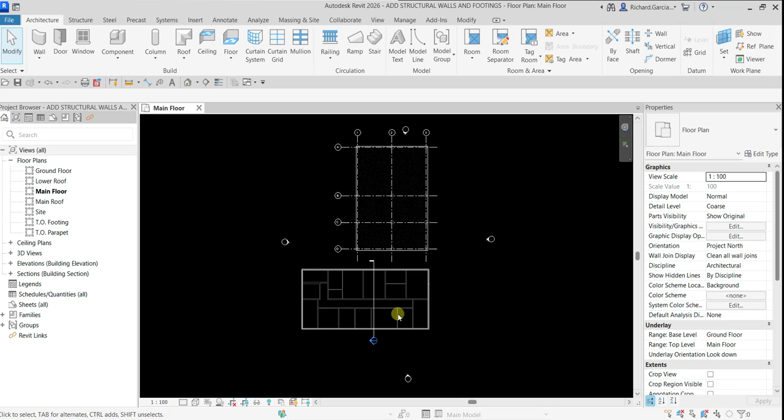Okay, so let me just go back. All right. So here, let's add a structural foundation wall, here in this area. Let's go to our architecture tab, wall. We will be selecting here wall structural, and then we are going to use foundation wall 300 mm. So let's check the properties here. We will be using this basic wall foundation 300 mm.

And since this is a foundation wall, you will not be able to change the depth settings here. That's how the foundation wall works. Basically it will start from your current level and go down from the main floor to the lower portion of the main floor. For the height of our wall, let's change this to 1950. And then for the location line, let's use core face interior.

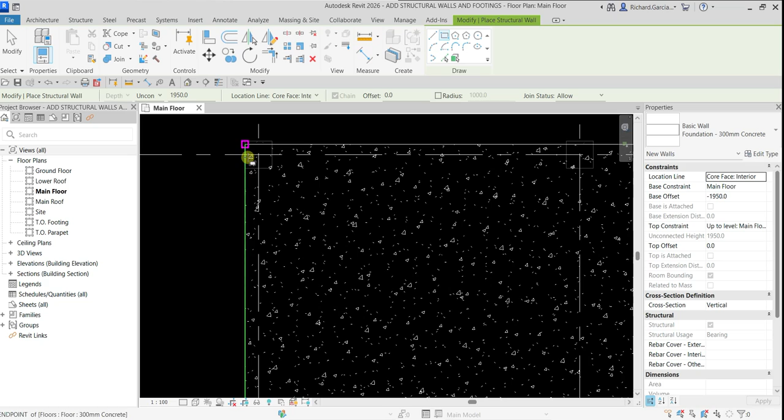For the draw option, since this is a rectangular shape, I'll just select rectangle. There you go. We are now ready to create our foundation wall. I will be starting at the upper left corner of the floor slab. Click that one, and then click the second point of our floor slab. There you go. So there's our wall foundation. And then I'm going to select modify.

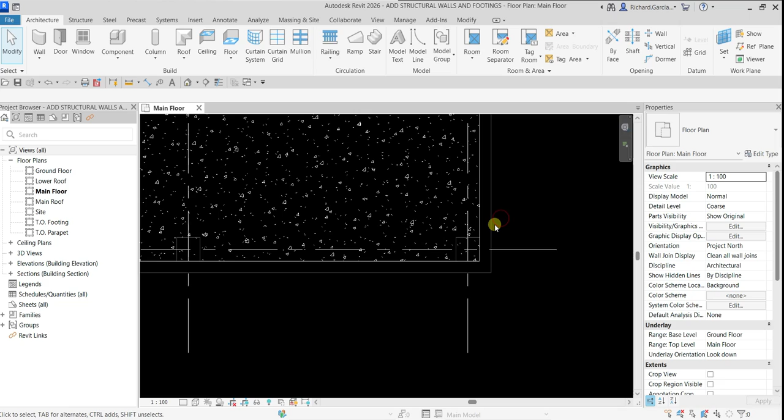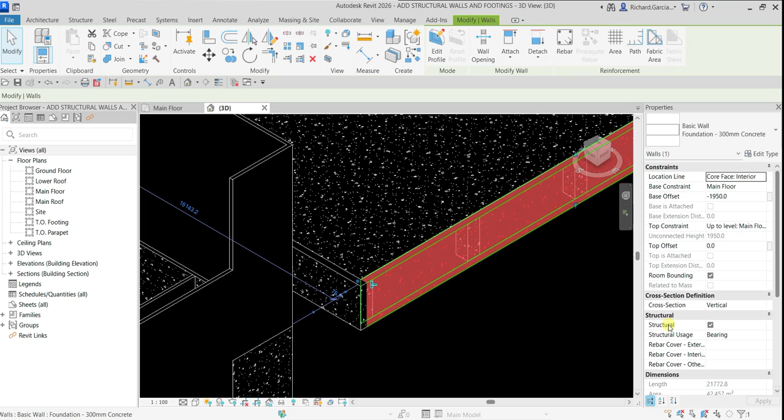Now I'm going to select one of the structural walls that we just placed. Let's go to the 3D view and have a look. This one, right? This is our foundation wall. I'm going to select this. Here on our properties, notice that on the structural panel, the structural usage for this one is bearing, which is correct. So that's for our wall foundation.

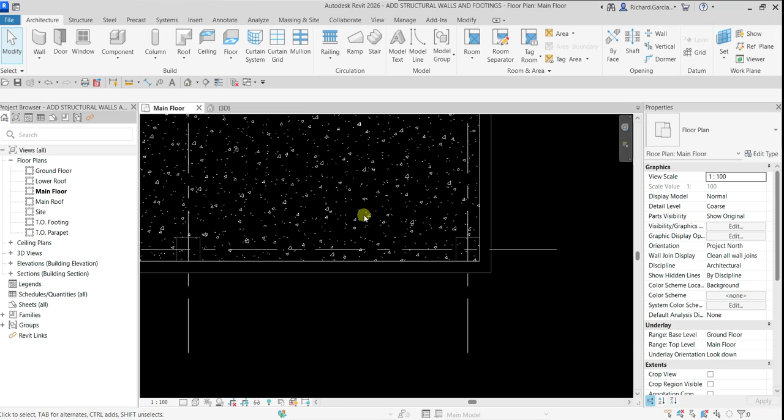Now the next thing, going back to our main floor, we're going to place continuous wall footings and then isolated footings. So let's create first our continuous wall footing. Let me just zoom out. Let's go to our structure tab, and then on foundation, we will be selecting the wall foundation. It creates foundations hosted by walls. So I'm going to select this.

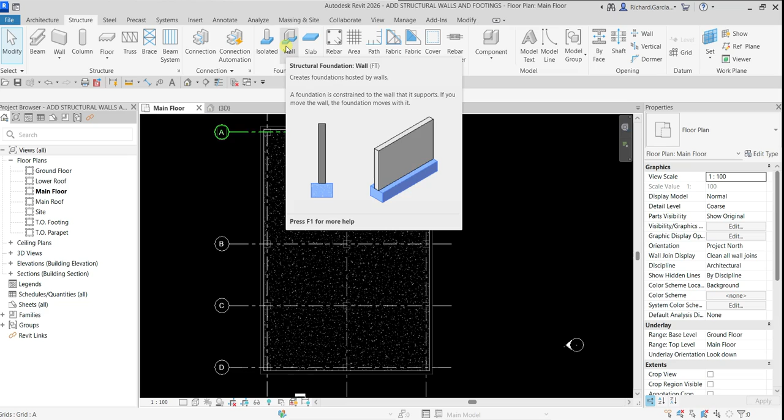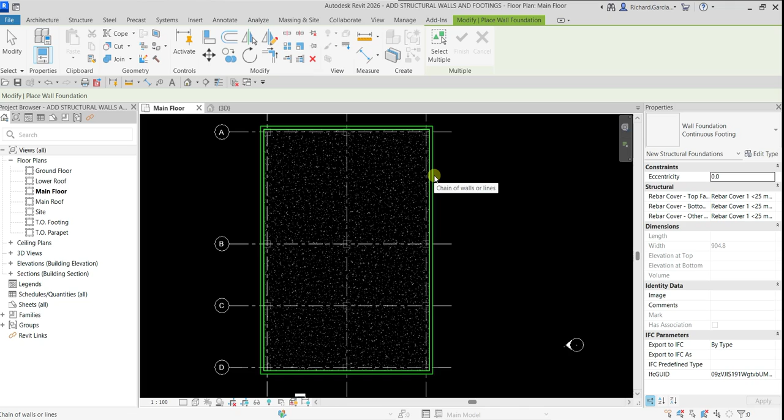Then I'm going to place my cursor over one of the structural walls, this one. I'm not going to click yet. Just move your pointer over that structural wall and press tab. Once you press tab, it will highlight all 4 walls. Let me do it again. I move my pointer over the foundation wall and press tab once, and it highlights the 4 walls. Once it highlights, click to place our continuous wall footings under the walls.

So I'll just select modify, and then let's have a look at the 3D view. And there you go. Let's change the detail level to fine, visual style to shaded. So that's the one that we just created.

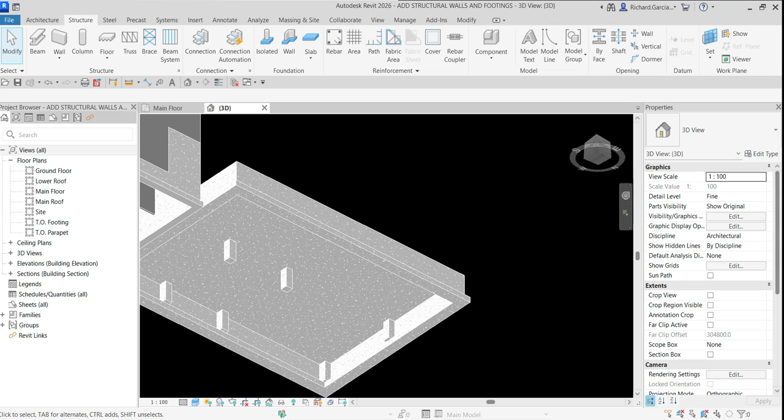Let's go back to our main floor. This time we are going to use isolated foundation. Let's click this one and wait. You see there's an option here: mode and multiple on our contextual tab, where you can place your isolated foundation at grids or at columns. I'm going to place it at the columns because we already have columns here. So I'm going to select at columns.

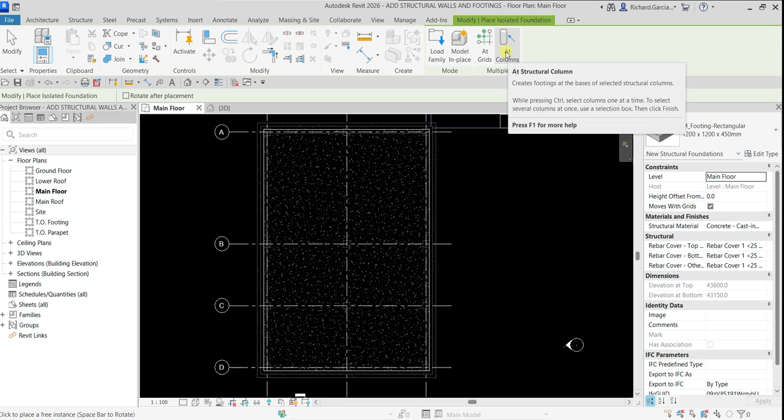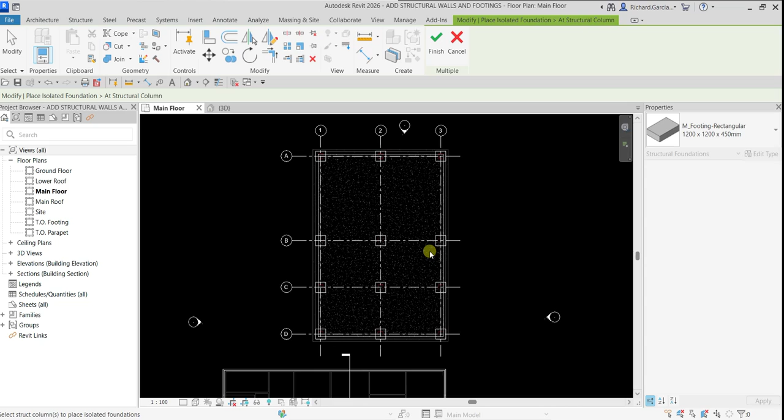We need to select all the columns, and our isolated footing will be placed under each column. Let's use window selection, and as you can see, it's highlighting the columns. Once I select it, it shows a preview of our isolated footing. After that, just select finish and you're done. There's a warning: an attached structural foundation will be moved to the bottom of the column, which is what we want. So just close that warning.

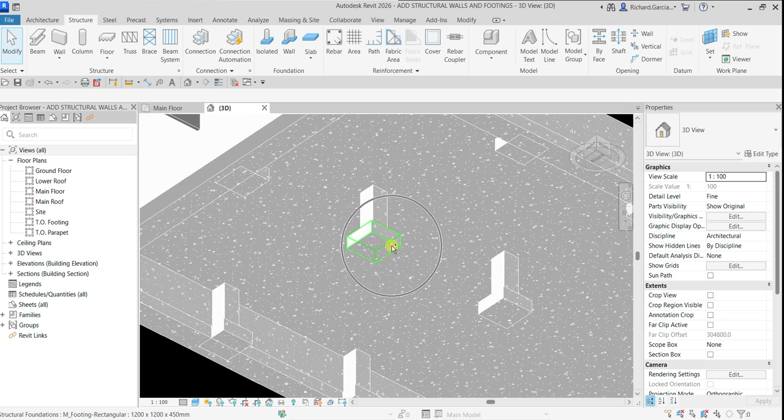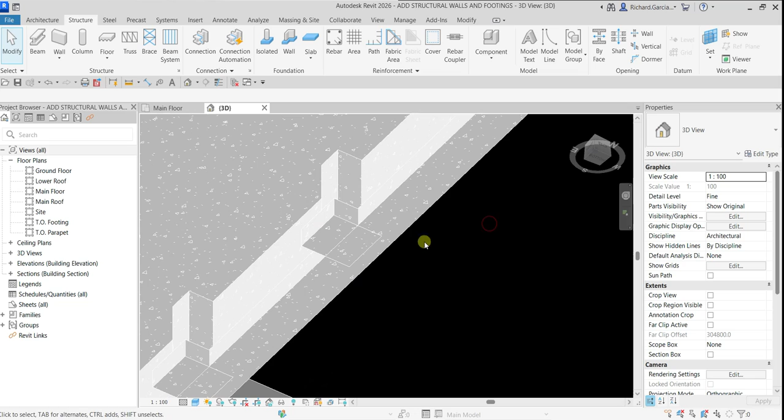Then select modify, and let's have a look at the 3D view. There you go, there's our isolated footing. The next thing, let us tidy up our model. As you can see here, for example, I want to join this foundation wall to this isolated footing. So let us just join that one.

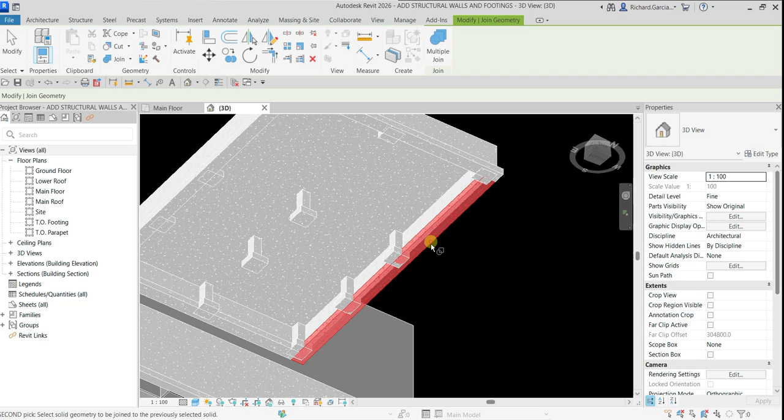Let's go to modify, geometry, and there's the join tool. I'm going to select this, then first select the wall foundation, the continuous footing. Click that, and then select the isolated footing that you want to join, this one here. There you go, it's now cleanly joined. Let's do it again. Select this continuous wall footing and then the isolated footing, and there you go. It's now nicely joined.

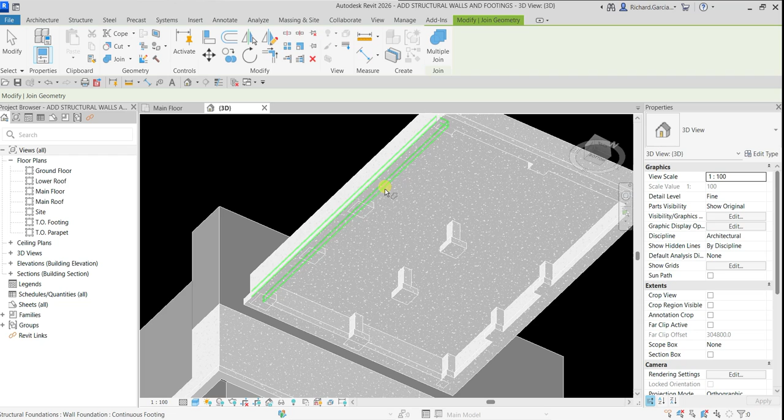Let's click this and then click that isolated footing, and there you go, it's now joined. And then the last side, click, click. There you have it. Right, so that's it for that simple exercise. Hopefully you learned something from this video.